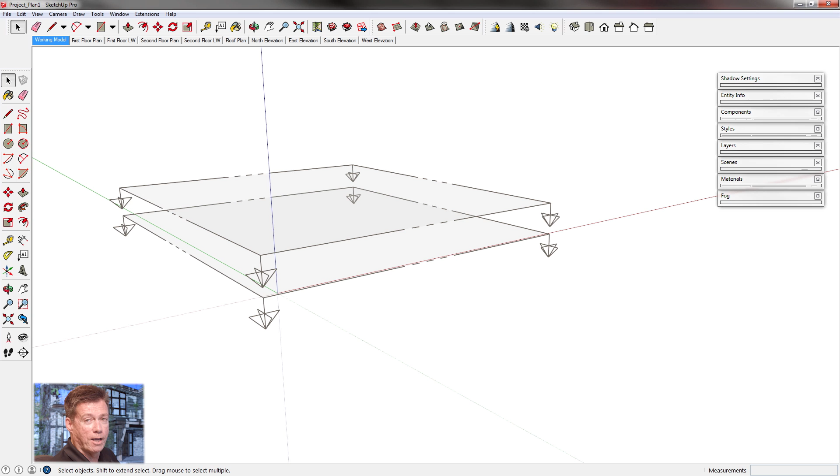Sometimes you have to vary that and move them around to position them so you can capture more openings. For instance, if you have high clerestory windows, you might want to capture some of those. But they are set up pretty well at a good distance that works for most projects.

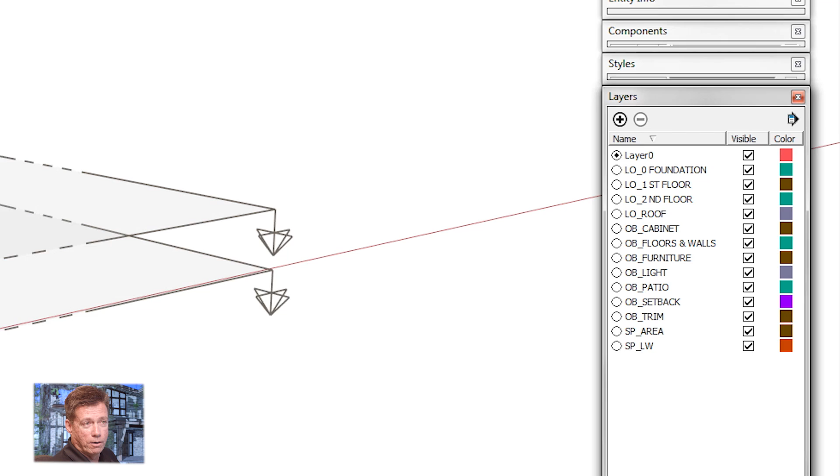I also have each one of the scenes saved that I will generate a scene for layout, so it'll be looking at the elevations, floor plans, and roof plan for this type of file. You'll notice in the layers, it's a pretty simple layout with a hierarchy of a level system, so it has foundation, first floor, second floor, and roof.

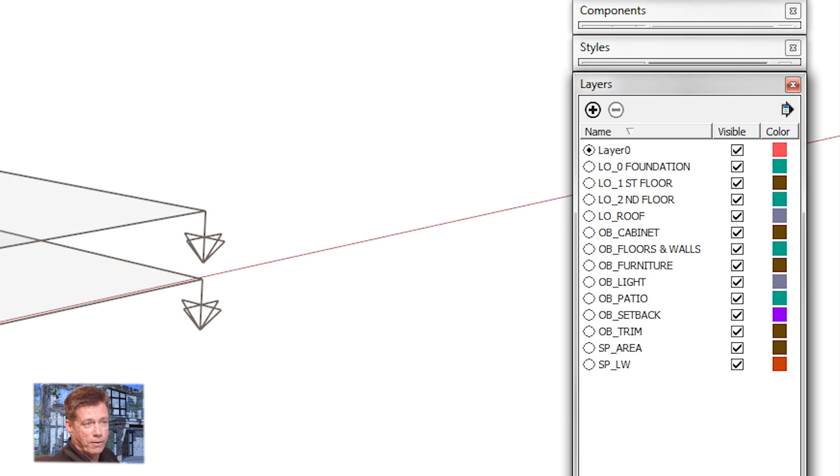Then there are objects and special layers that are all contained within these other groups on these layers, so I can control them individually or globally with the level layers. Those are objects like cabinets, floors and walls, furniture, lights, patio, setback, trim, and then I have a couple of special layers that are either for gathering information like calculating area, or line work, which is generated to vector render into layout.

So I'm going to switch now to a plan that is already in one of these templates, and I'm going to show two versions of it. This is a schematic design of a house. You can see it's still set up in this layering system, and you have control over the different elements.

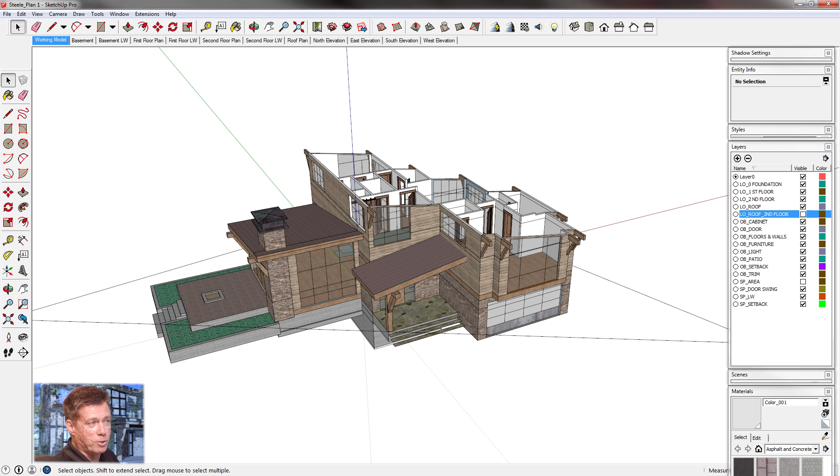Very simple globally with the level layers. In this case, I've generated a second floor roof layer, and you can really only determine if you need to do that after you've generated your section and positioned it correctly. Sometimes you need to do that so you don't see some part of a roof layer that obscures another part of the floor plan. That's really on a case-by-case basis.

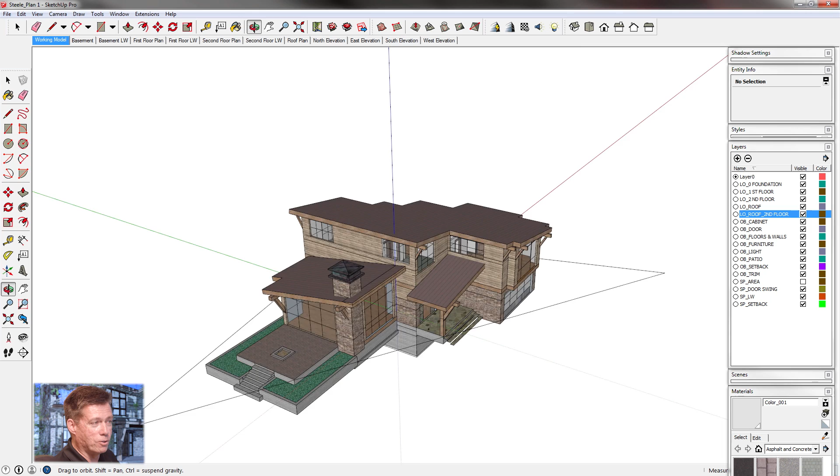Same with cabinets, floors and walls, things like that are all set on these different layers. You'll notice there is a site layer, which is the setback layer. I always import that directly from the site, so I'm well aware of where the building's position is relative to any setbacks on the property. It's also what I use to position the home in the site model.

You can see here each one of these images are saved. During the schematic design, I use a more sketchy style. It helps the client think they have a little bit more flexibility, which of course they have more than they realize, even though the plans look somewhat finished.

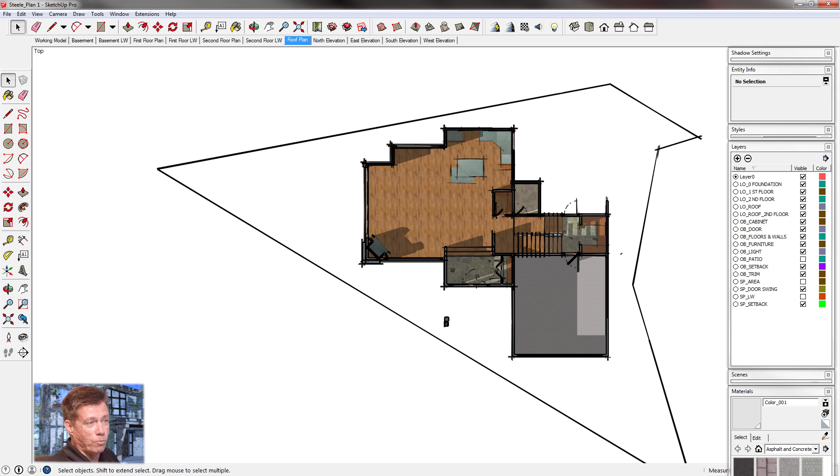As you go through each one of these, you'll see what the relationship of each one of these elements are - north elevation, east elevation - all of these are already preset and set up. Now you can adjust them based on your screen or whatever, but it really doesn't matter once you have them organized.

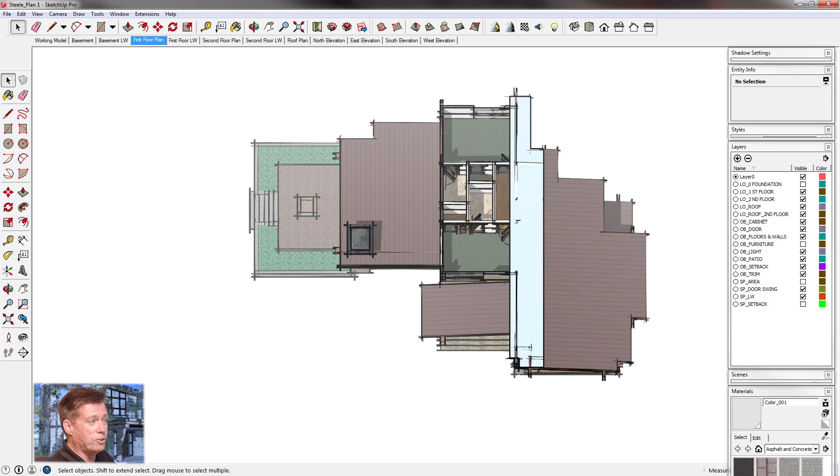One of the key elements that's important in SketchUp and scenes, and this applies to any type of SketchUp scene, is that you have alignment. You want to make sure your SketchUp view matches for each floor plan so that the second floor plan overlays directly over that floor plan. It becomes a great factor for speeding things up in layout.

I just noticed my roof plan actually does have the section line cut, so I need to update that on this layer, which is very simple. I took the section cut off. I'm going to update it. It's probably going to ask me if I want to create a new scene, and I'm going to save that as a new style.

The reason that is this way is in the schematic design phase, I typically don't show the client a roof plan. That happens as the project develops further, so I'll show you where this project goes. As each phase occurs or any changes occur, I always save different versions of the plan, so we can always go back if the design changes.

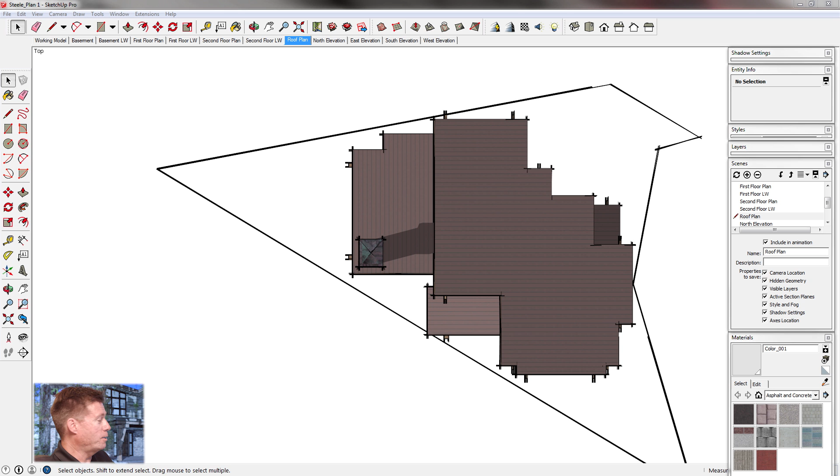This one is the first shot at the design. We are actually on the final, which only took three. You can see here there's a lot more detail, and so in this case, I don't use a sketchy style anymore, I use a more refined style. In this phase, I also show all the furniture so we know how things fit.

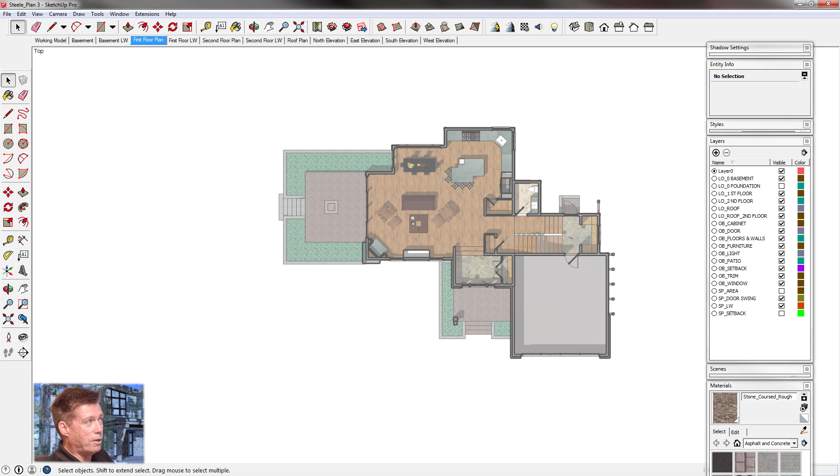All the floors are aligned. There's a lot more detail on the project. I'll just click through each one of the views real fast so you can see how they relate to each other. Roof plan, as well as all the elevations, are much further refined.

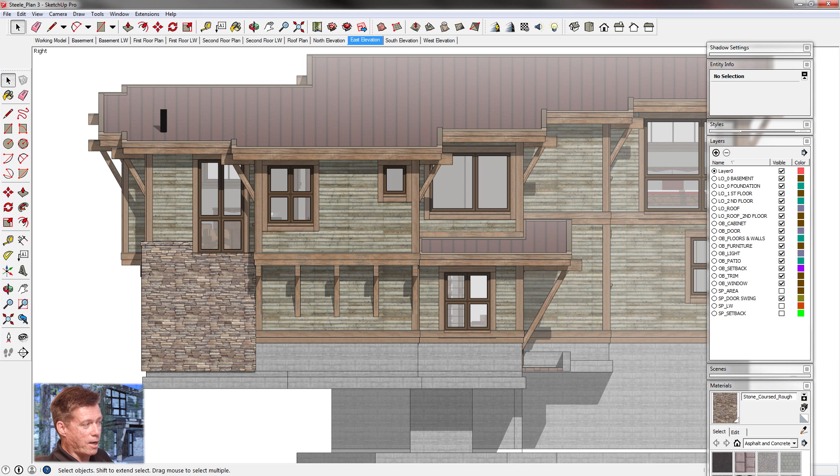You can see there's a lot of detail as far as trim, not only on the windows and doors, but on corner boards, as well as the foundation shown to its actual depth, as well as footings. This has more detail like these knee braces here, the stone wainscot shown with actual thickness to it, as opposed to just a blank material.

Continuing around. And so again, all of these elements work really well with a simple system of scenes and layers to be able to document a home quickly.